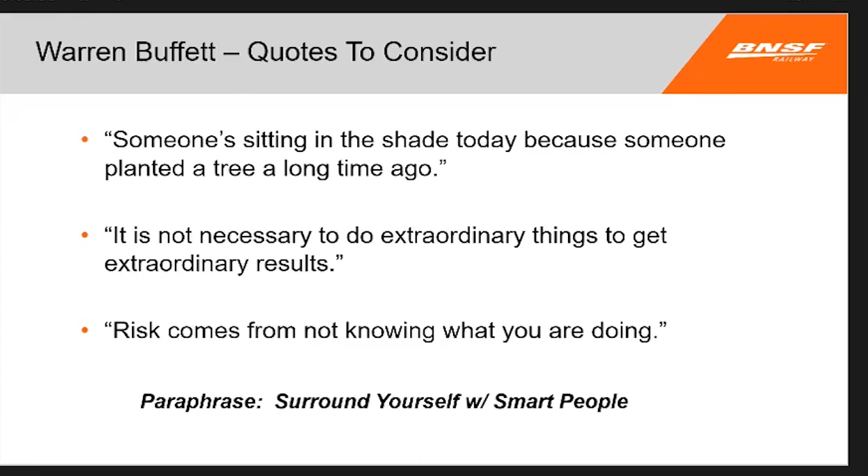But you think about this conference here, and there's a lot of smart people in the room. You start looking around, I see a lot of industry experts, and that's why we're here. We're surrounding ourselves. You can't do this stuff on Zoom, all the sidebar conversations and things like that. So it's really great we're here.

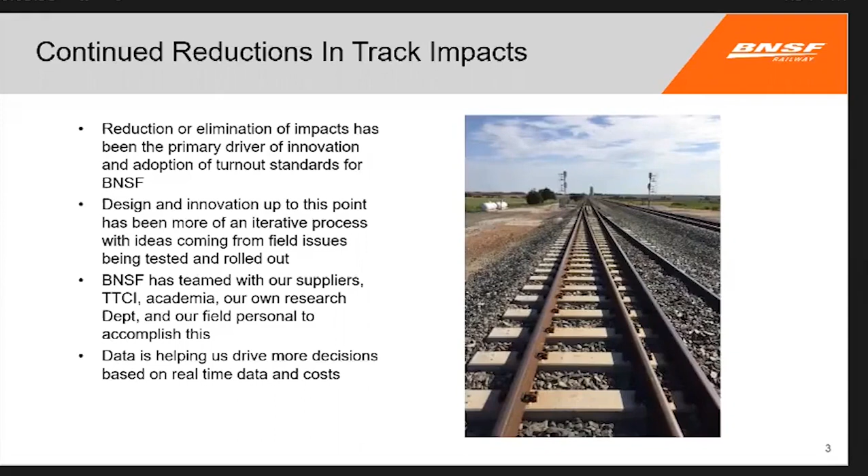Just a comment here. I mean, really what we're doing up here with standards and some of the things that John talked about, we're just reducing track impacts, right? When impacts happen out online, bad things happen. So a lot of our design and considerations are really because we're trying to reduce impacts.

For 22, we've been looking at tie pads for quite a while. I can't remember exactly when we started, maybe 2015 or so. And this year we're kind of moving into a large scale test. We've got 6 miles going out in the Kansas area. We've got some crossovers we're putting in California. We got a wood tie crossover going in Kansas. We've got some transitions that we're doing, road crossing transitions, and I'll get into some of these a little bit later.

We're continuing with our ballast mat and putting concrete ties on bridges, and then of course our diamond program, and I think we've pretty well settled on that one. And of course we need that population to reduce variability. You do these tests and sometimes things don't go right, or you get a result, and the more you have out there, the better your result's going to be.

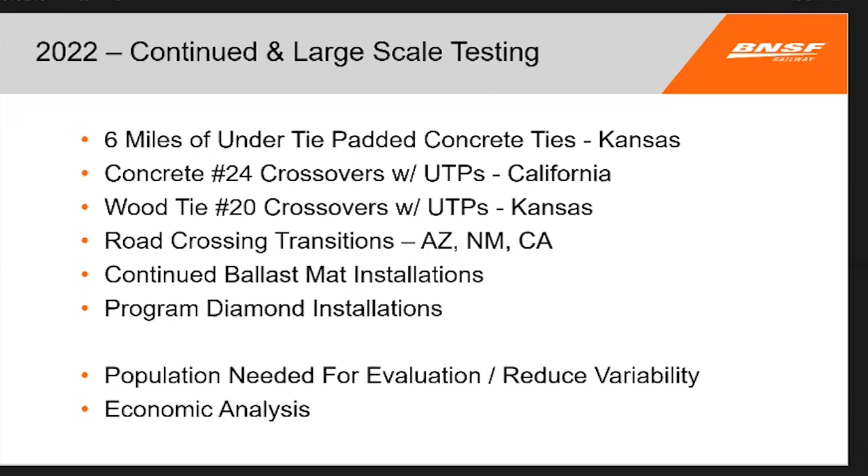And then of course the big one you've got to answer, right? Is it going to pay for itself? That's the bottom line question. Is it going to make sense? Is it going to pay for itself? I don't cover this one a lot. I think I've shown this one in the past too. With under tie pads, you're really increasing your bearing area. That's kind of it in a nutshell. And ultimately, we're trying to reduce the ballast breakdown and the bad things that happen after that.

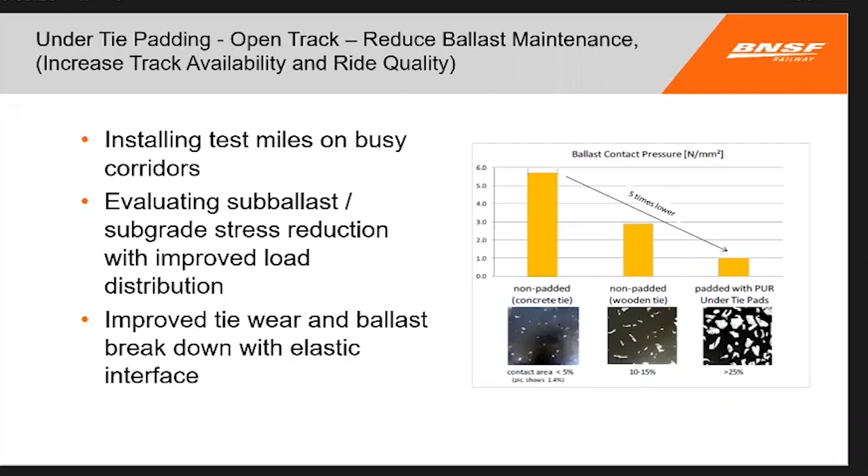I was out with Rusty Crawley here with Vossloh. There's Rusty. We went out, was that 2 weeks ago? We went up on Crawford Hill, and ironically, it's the same curve that John Check mentioned in his talk here a little bit ago. But the very same area where we tend to go to these areas, right? This is where we have our biggest problems. So you want to test everything, and if it doesn't work up there, then it doesn't work. But that's not necessarily correct.

But anyway, we walked that, and you always pick up a lot of things because things obviously happen very fast up there. And the other site is Cajon Pass out in California, dropping down into the LA basin. Things happen fast, and you've got to keep up with things. So usually if things pop up there, we like to jump on them to make sure that we're ahead of the game. So if it happens somewhere else, we're not unprepared. But I think also we need to look to other sites too that have been successful.

There's a picture there on the left, and as far as I can tell, Adam Bankston is here. He's our tie expert, puts together our program. But as far as I know, these are the oldest ties still in track, and they actually date to 1970. I think they were part of an AREA test, and they're still out there. So you start thinking about that, that's like 52 years ago, and they're still out there.

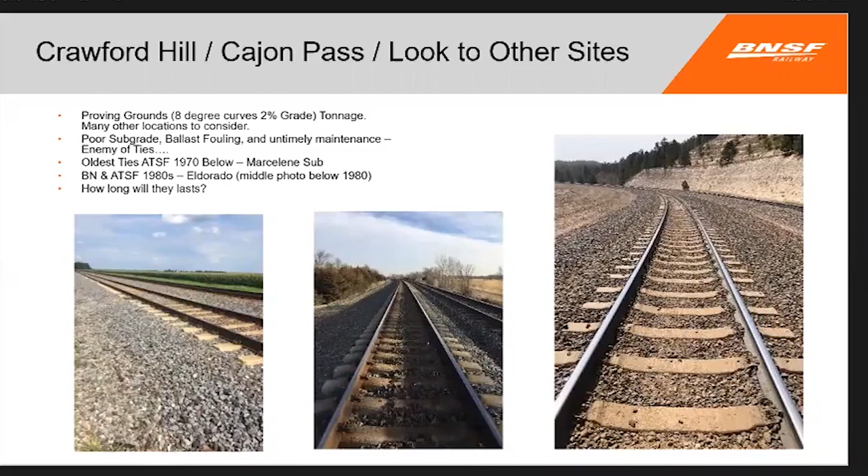Some of the testing here we've done are with, I'm going to say TTCI, but it's MXV. But here we took some of our ties that we thought had failed, they put them in track, and they lasted another 600 million gross tons or something like that. So some of the ties that even look ugly to us seem to be lasting really well.

Just hit on this one a little bit too. I know John mentioned a lot of this. We're trying to be more technology driven and to make better decisions. We're trying to eliminate our service interruptions, like John said. So to do that, we've got to understand why. I'm going to mention Charity Duran. I think this data team is probably one of the best decisions ever made by BNSF.

I can remember when I first started, we were putting together the RIS program, the Roadway Information System, and we didn't even know what kind of rail we had out there. But starting in 1989, we were out there just with a clipboard, looking at the stamps on the rail, trying to inventory 2,000-3,000 miles of track out on the Nebraska division.

So I'm really excited about that, because I think that's going to be huge as far as evaluating a lot of the things that we're trying out. We do a lot of tests, and in the past it's been, we think it's better, but this really helps us. So I'm really excited that Charity's in that position, and I think it's great.

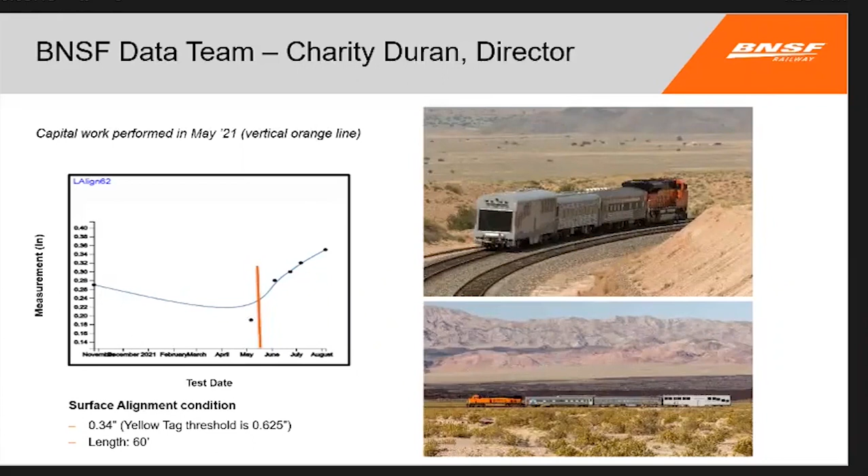The other thing with tie pads I'm going to mention is refinement and analysis and production and considerations and cost. Anytime you're introducing something new, there's a lot of products out there, a lot of things to test, a lot of ways to test it. And this was one actually that just got started. I was approached by Dow about tie plugging material, and I said, hey, can you put something on the bottom of a tie that would give us a pad and behave in a certain way? And lo and behold, they came up with something.

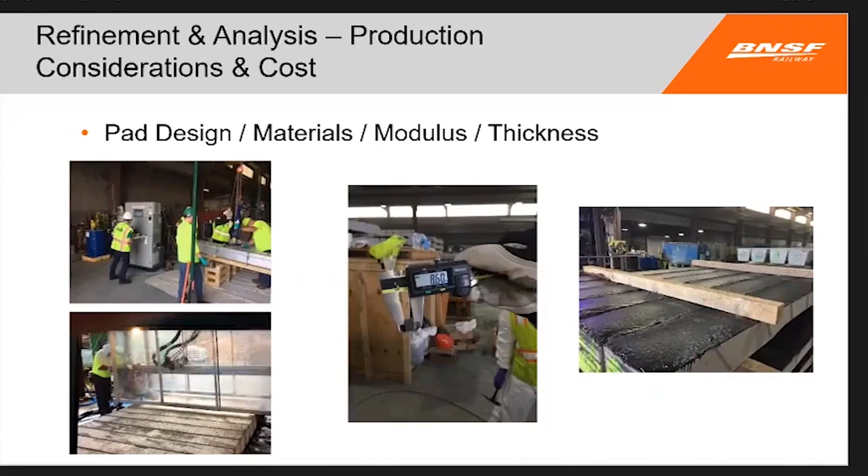I don't know if there's any Amtrak people here, but I think they jumped us a little bit, because they got a test strip out there, and I think it's performed well. They've skipped a couple tamping cycles, and I think they've ordered 40,000 more ties. So they're forging ahead of us. We don't like to be behind, but that's just something we're looking at, or at least one design.

As far as installing, you always learn a lot of things, and that's why you never want to do a large scale installation, because you learn things as you go. So we've learned some things during these installations. You can see on the left there, when you think your ballast mat is laid down on your bridge and you go out and inspect it, and the cats kind of tore it up when they put the ballast on. So things happen out there, there's a lot of ways we can improve, and sometimes it skews your tests and throws things off.

The middle pictures there are some of the first spray-on type pads that we did, and you can see some of the overrun, and that created some issues in the field as far as ties sticking together and rolling and things like that. So there's some improvements we can do there. Of course, you add a pad to a tie, and the clip, our dunnage, everything gets really close. Our TLM can't clamp them up to set them in the machine. So there's those kind of considerations.

On the right there is a padded wood tie turnout we did in Illinois, and the pads come off if people aren't careful. And so there's a lot of things you learn as you go along.

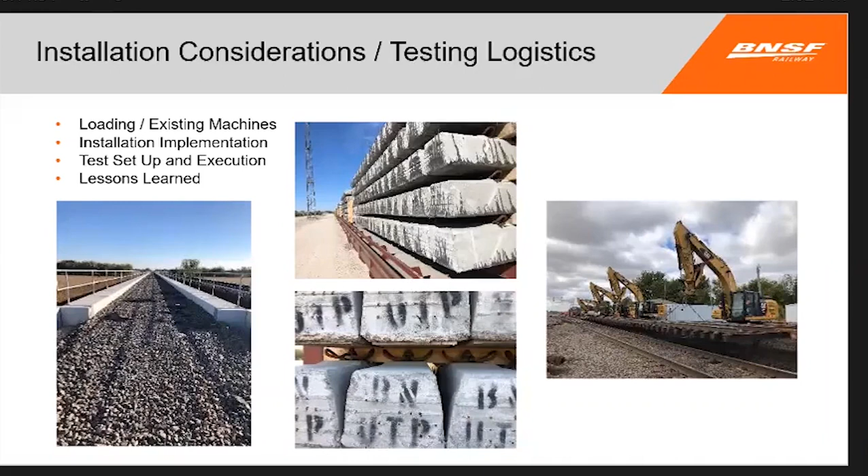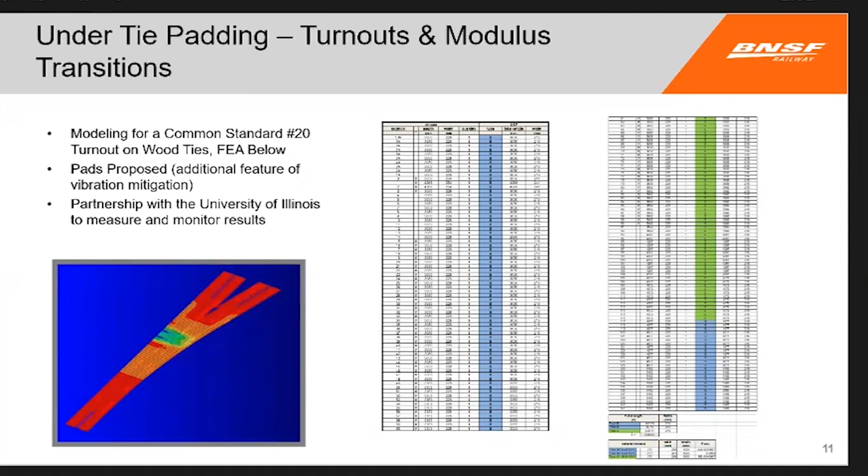We've had a lot of help here from Getzner and others as far as evaluating what kind of pad we should use. We like to keep things simple, because the more complicated you make things, the more you screw it up usually. So we're trying to keep things simple as far as modulus transitions and staying with a limited number of pads.

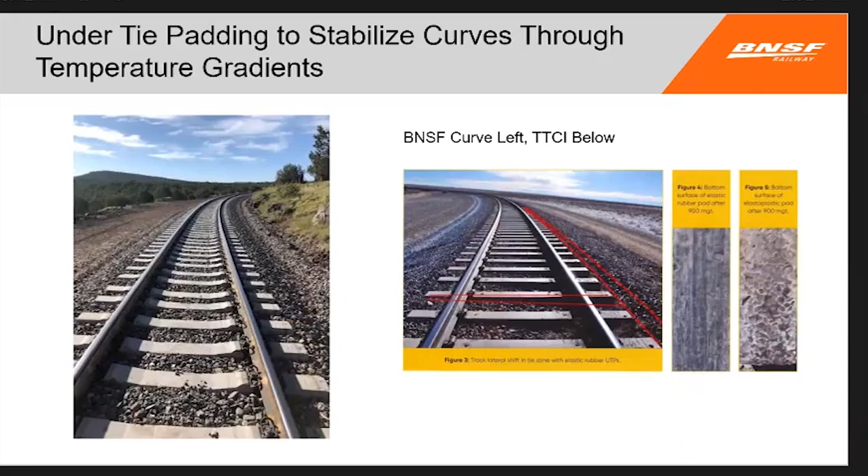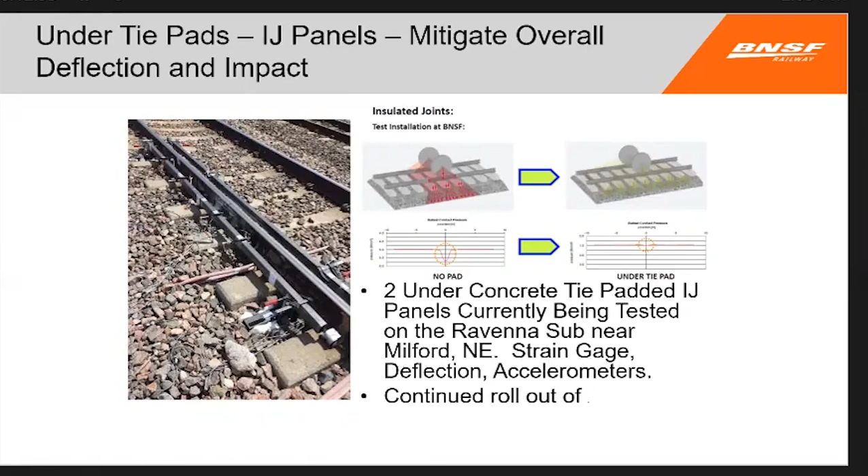We're also looking at pads with IJs. We typically put wood tie panels in, so we're looking at padded ties to control the deflection at IJs. That's something we've done some testing on, and we still are. We haven't quite adopted that one yet.

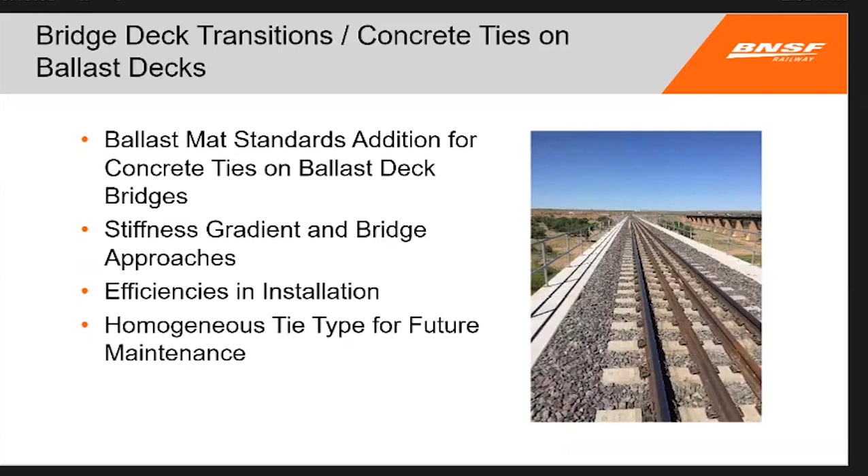We adopted this one probably in 2015 as far as putting pads on bridges, and we've had success with that. That's out in New Mexico by Fort Sumner, Pecos River. Our old standard was you'd come in concrete, and then you'd go wood ties across the bridge. So we went with ballast mat and concrete ties across the bridge, just to keep that homogeneous tie type for future maintenance.

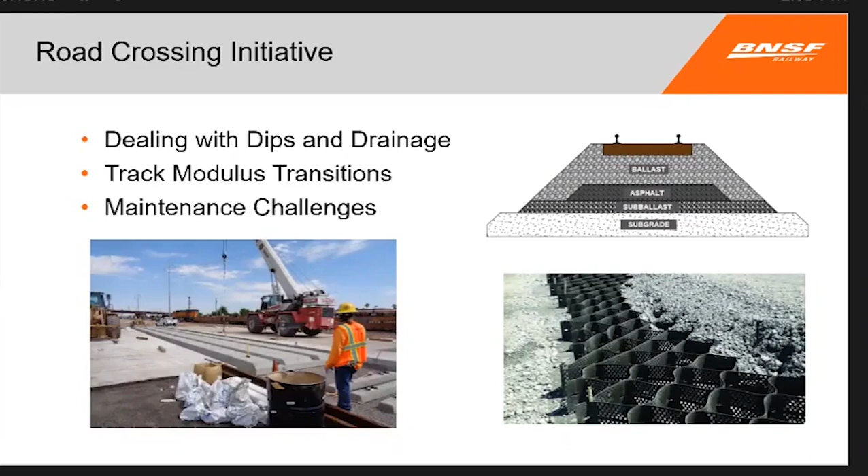I don't know if Kelly's still here. I got Kelly working on some of our road crossing initiatives; that's another place we see issues with our geometry cars. We get dips and issues going into road crossings.

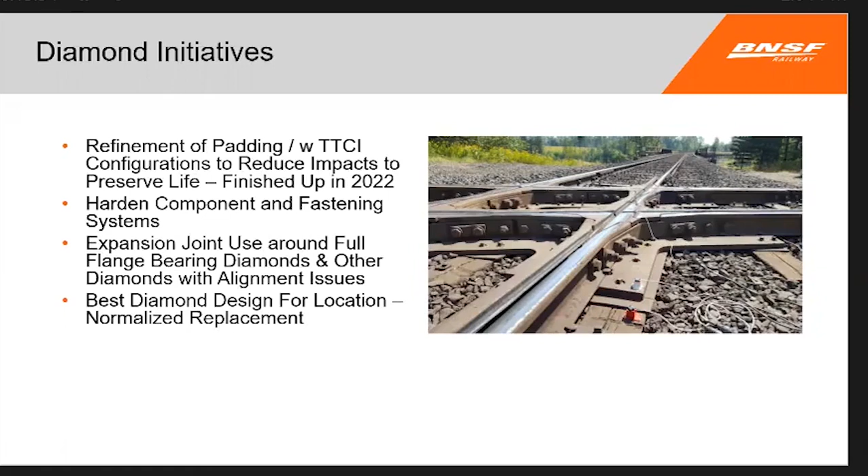Diamonds, I think we've kind of settled where we're going to go on this one. We've tried under casting pads and they just haven't worked for us. It's been too much vibration. So we've settled on this. And here I said TTCI. I said I wasn't going to say it, but TTCI helped us with that one. And I think we've settled on that as far as our design.

This was another one, and Ricardo's still here, maybe he's gone, but we're going to be looking at this too as far as transitions going into road crossings.

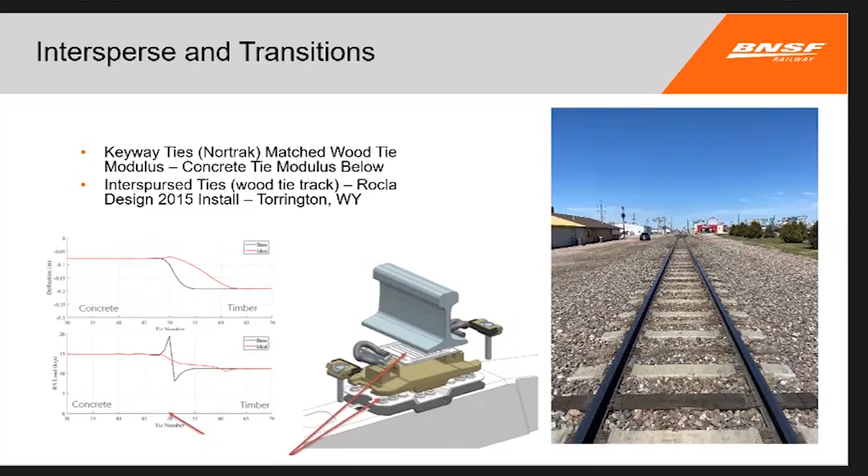And something we've been looking at too, and this is one I walked with Rusty the other day up in Torrington, Wyoming: coming up with an interspersed tie that works in track where you can convert to concrete over time. It looked pretty good. There was one spot there, and you hate to taint a whole test on one spot, but sometimes that happens. So we're still open to that one.

As far as this one, I think I'll turn it over to Brett. I kind of sped through mine, so I'll let Brett go and turn it over to you.

Okay, is my mic? Yeah, my mic is... okay, can you hear me in the back? Perfect.

So we presented the beginnings of the University of Illinois BNSF under tie pad research project at last year's virtual symposium. For this symposium, we have a couple of updates as well as some new research we've been undertaking in the past year. The motivation and objective is the same as last year. We are looking at the effects of under tie pads on substructure stresses and the overall performance of the track.

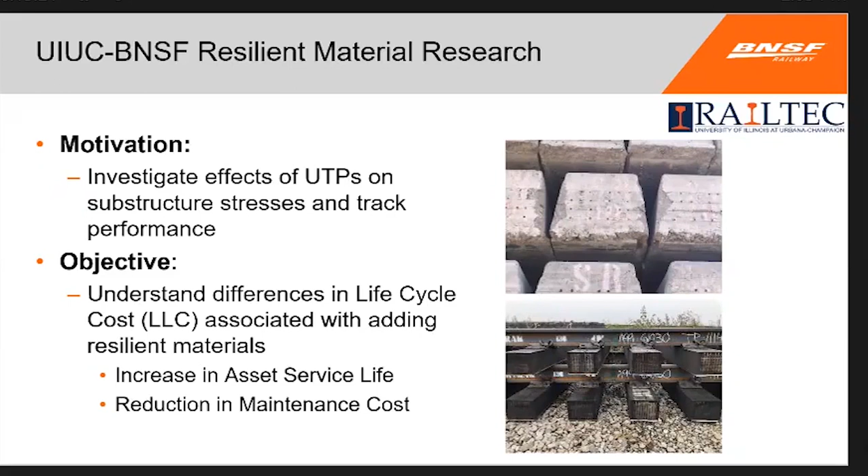And we want to figure out if the under tie pads save enough money in asset service life and in maintenance costs that they are worth the outlay BNSF would have to spend at the beginning of the project. So the first thing we did is we went into the lab to look at the magnitude of the substructure bearing pressures under various cross tie types and under tie pad types to inform the field work we are doing in the open track. We completed this last year and presented it at this conference last year.

Then we went to the open track out in Arizona and looked at the substructure pressures, the subballast pressures resulting from either a section with under tie pads or a section without. We are also looking at turnouts. BNSF has a bunch of wood tie turnouts on their network, and they've been interested in adding under tie pads to those turnouts. And as Eric mentioned, there's the 6-mile section on the Emporia sub, which has bridges, curves, and road crossings, so we've been starting to investigate that.

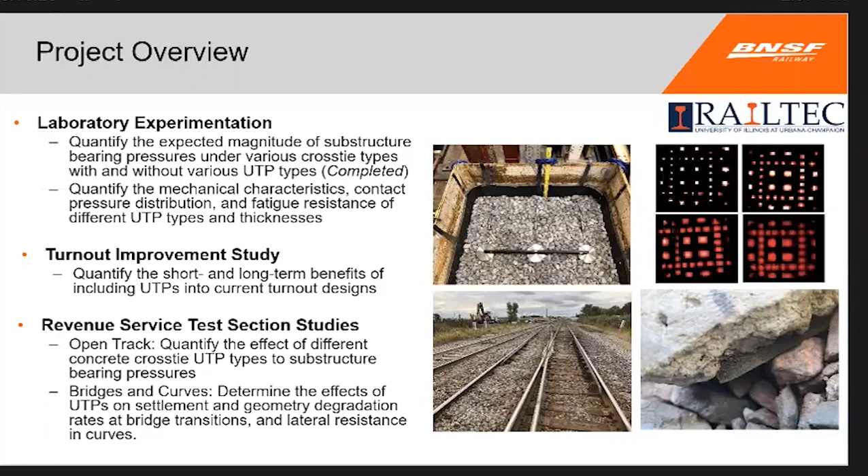And finally, we will be heading back into the lab to look at some more mechanical characteristics, contact pressure distribution, and the fatigue resistance of different under tie pads. That will be the upcoming lab work over the next year. We will be looking first and foremost at the mechanical characteristics and the pressure distributions, which will be largely an expansion of the work that Jacob Branson completed here at RAILTEC in 2019 and 2020.

In addition, we will be looking at fatigue resistance, in particular, the mechanical resistance to repeated loading and also the breakdown of under tie pads over time. There isn't a lot of published third-party research on the life cycle and the amount of time that under tie pads last, so we're hoping that we can get an idea as to how long under tie pads last with the research that we've been doing here.

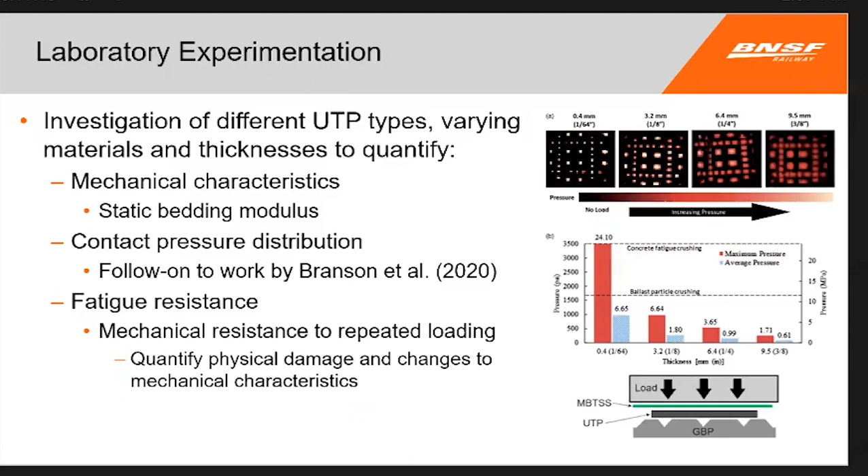So the next thrust of our research is the turnout improvement study. What we're looking at here is installing under tie pads on BNSF's standard wood cross-tie turnouts. Currently we have three sets of turnouts, each with a control turnout and a padded turnout, two in Illinois and one set in Oklahoma, and we will be adding a set of turnouts in Kansas once they are put in place.

We are looking at a variety of metrics: the vertical track deflection, which is the deflection at the point of frog, to look at the displacement of the frog casting. We're also looking at the frog casting acceleration to look at the wheel impacts. We are looking at the absolute and differential track settlement by level survey to look at compaction and consolidation of ballast, plus any potential issues with differential settlements. And finally, we'll be looking at the geometry car data to look at the rate of degradation of the geometry.

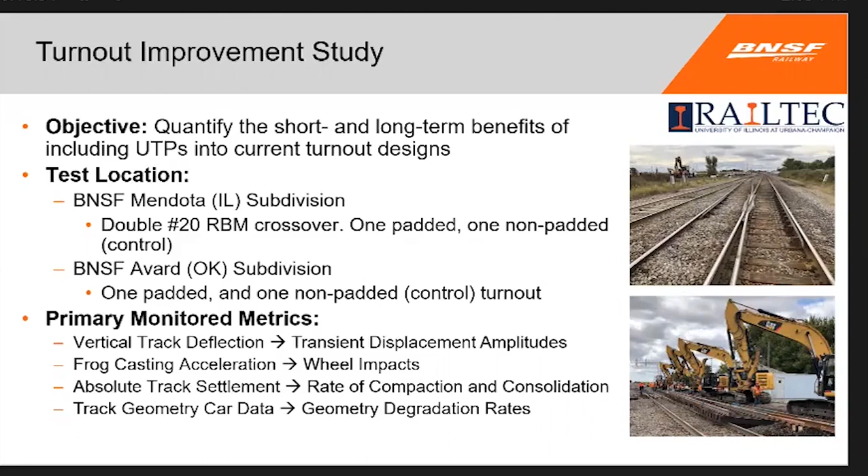So we have some preliminary results from the turnout study, with the note that we are only at about 40 million gross tons for the two turnouts in Illinois. We're hoping that we can run the study through at least about 100 million gross tons or so, which is what the UIC over in Europe recommends for an under tie pad study.

But the padded turnouts between Illinois and also the two in Oklahoma, which are up a little higher in their tonnage, are showing a pretty consistent displacement between about 6/100ths to 10/100ths of an inch, whereas the control turnouts, the unpadded turnouts, are much more variable. We have also been noticing that the frog casting displacements start quite high and then decrease pretty rapidly until about 15 million gross tons, and then they seem to level off.

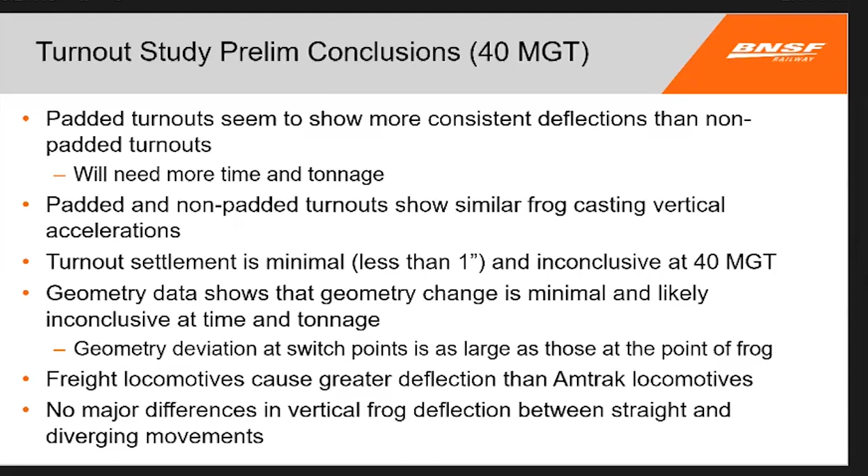Two other kind of side notes: the Illinois turnouts are on a shared Amtrak freight corridor, and the freight locomotives cause a greater deflection than the Amtrak locomotives, which makes sense because the freight locomotives are heavier. We also have straight and diverging movements, and the frog deflections between the straight and diverging movements in the vertical direction seem to be about the same for each, all else equal.

The second thrust of our research in the field is the open track bearing pressure study out in Arizona. So we have a section with one type of under tie pads, a section with a second type of under tie pads, and then a section that has no under tie pads. We are measuring the ballast pressures four inches below the top of subballast at each of these sections.

So we have three pressure cells for each tie and two ties per section, so we can look at the pressures at the center, at the rail seat, and at the shoulder for each section, and then also compare between two different ties. We should be getting similar pressures for both ties in the same section. We have a load cell, a strain gauge load cell, above the cross ties for each section. The idea is that if you have identical loads for each of the three sections, and one section has significantly less pressure than the other two, then that section is probably outperforming the others.

We've been in for about 18 months here, and we're hoping to present the results soon, but we don't quite have them yet.

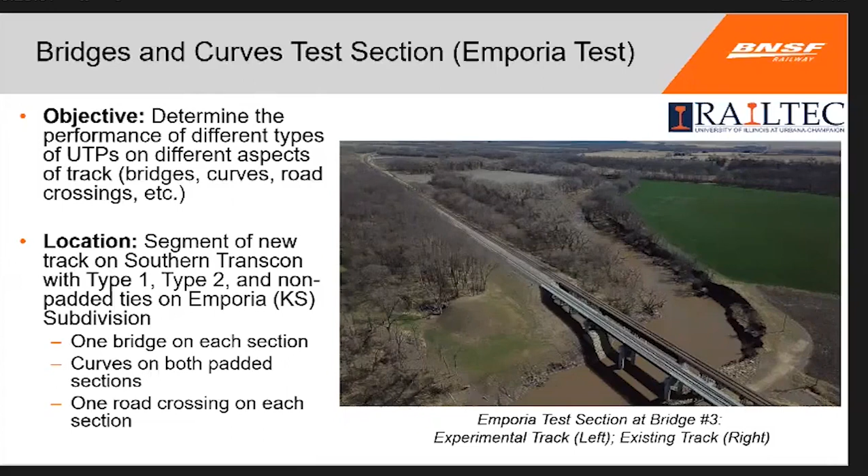So finally, as Eric mentioned, we have the Emporia section, and we have about 6 miles of track, some control track, some padded with one type of pads and some padded with another type of pads. Each of these sections has a road crossing, a bridge, and the 2 padded sections have a curve. So that allows us to compare a number of different metrics across each of the sections.

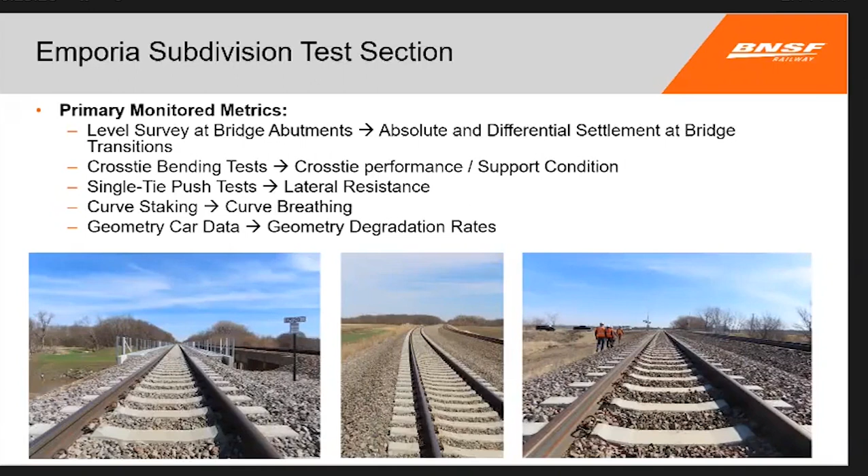We can look at the absolute and differential settlement, some cross-tie performance metrics, some lateral resistance and curve metrics. And finally, we'll be looking at the geometry car data to look at geometric degradation and also potentially to find additional locations that are problematic and may be worth instrumenting more in the future.

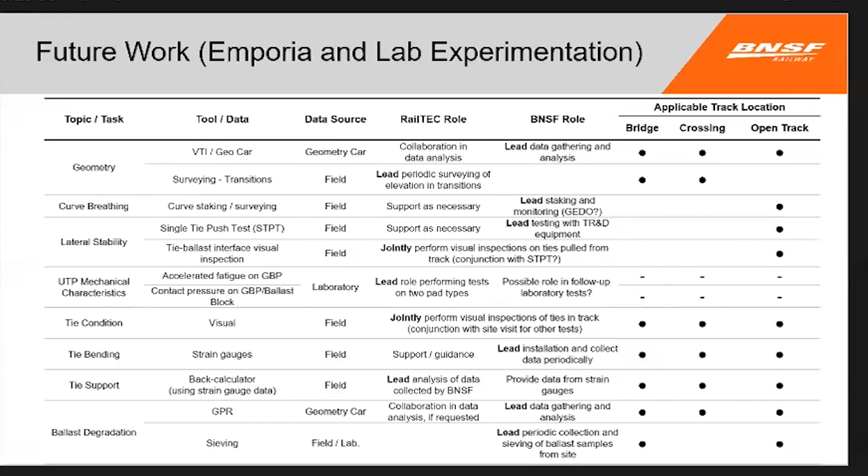So here's a good wrap-up table for some of the future work we will be doing. I won't go through this too thoroughly in the interest of time, but a couple other things are the ballast degradation through GPR or field work and sieving, and also some tie condition bending tie support tests. So I will hand it back to Eric, who will give a few wrap-up comments.

Okay, I think I got a green light. Thank you, Brett. Very exciting work going on here with our tie padding study, and I think we're getting enough territory or enough pads installed. I think we'll be able to make some good decisions going forward. That first stretch there actually was a 3-mile stretch, and now we're doing another 6 miles this fall. But I think we really need stretches like that to really be able to evaluate how they do.

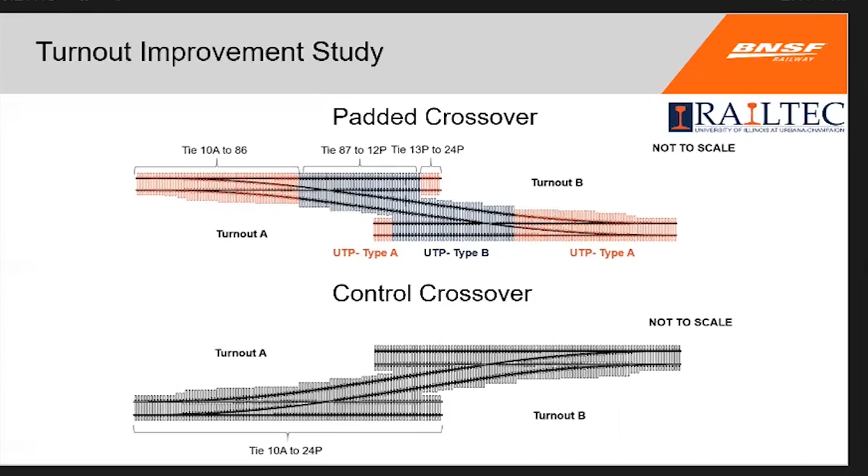But then to start dialing in, what do you do right before a road crossing or a bridge? Those are the really tough things to figure out. If you're speaking to the turnout specifically, the turnout is the same manufacturer, 2 different stiffnesses. The pressure distribution is so much lower when you use the under tie pad.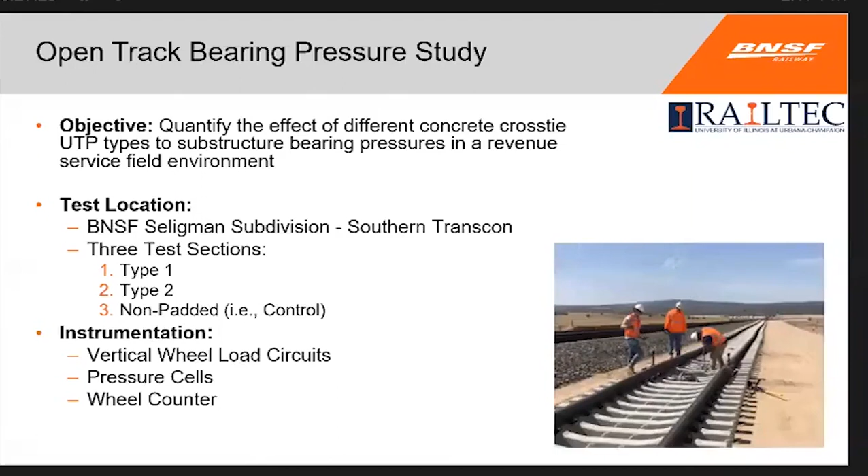Have you thought about modification of the center spacing, or are you just sticking with the standard spacing for now? No, we're sticking really with the standard spacing till we understand that better, how it distributes the load to the subgrade, which I think is going to change over time. It's not necessarily a static thing, and this is going to be a long-term study, of course, and hopefully we can make some decisions before that.

But I do think that one of the primary things, and even when Rusty and I were out on track, anytime you saw concrete ties with mud and broken ballast, that's where you run into the problems. And if we can eliminate the ballast breakdown, I think they're really going to show that they're going to pay for themselves.